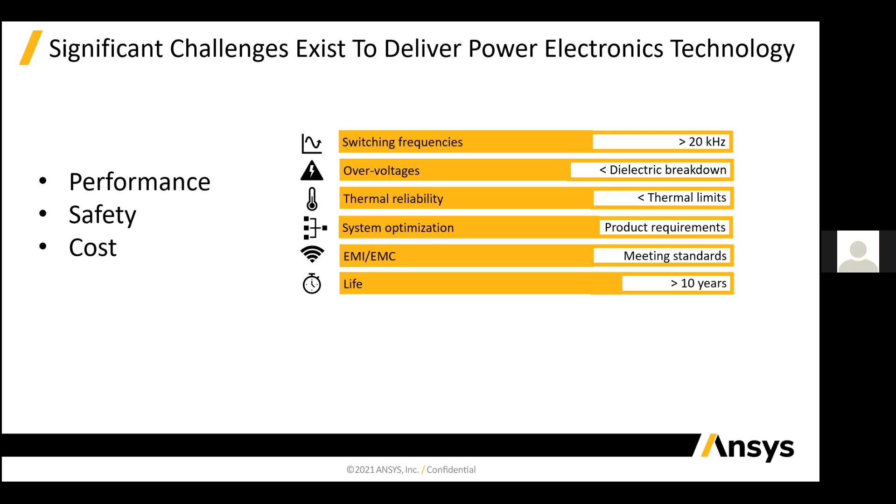Life expectancy also has to be considered, it should be more than 10 years, because people do not want to change all components after 1 year or 2 years, which would trouble their system. So life expectancy should be in the range of more than 10 years - as a standard, we will have to set it.

Next, by using ANSYS, you can increase your performance and speed up your model by up to 200x. We will also achieve design cycle reduction time up to 75%, and the total cost also reduces when we are finalizing and solving the whole model system.

I will also show you today how it looks when you connect the whole EV system in ANSYS. We will discuss this later in this session, and come to know what type of simulation is involved in that. We will also look into how to put the temperature part and how to use the data sheet part - I will show you that.

As we have already discussed, the power electronics requirements from the customer point of view or designer point of view - we basically want power density and increased lifetime, and how we want this increment with reduction of losses, thermal derating, noise, and the over voltage should be within range.

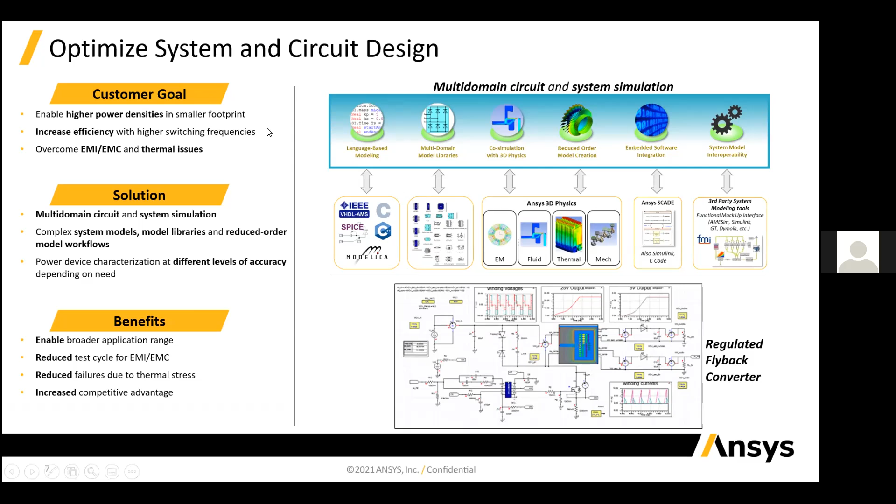Like if you have a small e-rickshaw, and you want to use that e-rickshaw in your designing part, for that you just have to make a range from where to where it will basically work. So that range part has to be considered when we are designing for e-rickshaw.

After that, when the design is over, we just have to look into the materials involved. For that, we will have to check the account for magnetics involved. We have to check what was the cable and what was the effect of that cable, and what electronic transformer is involved, and how we can simulate that transformer part.

And reduced order modeling, and how we can do that fast, so it will work very fast. For that we require temperature limits, and we have to take in or consider the constraints involved in the designing part.

Like you can see here, we have a PMSM machine, and then the load is connected with that, and we are basically having an inverter part. In that, the inverter is controlled by space vector modulation technique, and there are IGBTs, and that IGBT will basically help you control the switching frequency given to the IGBTs, and that IGBT will control the level of voltage and current in the PMSM to run fine.

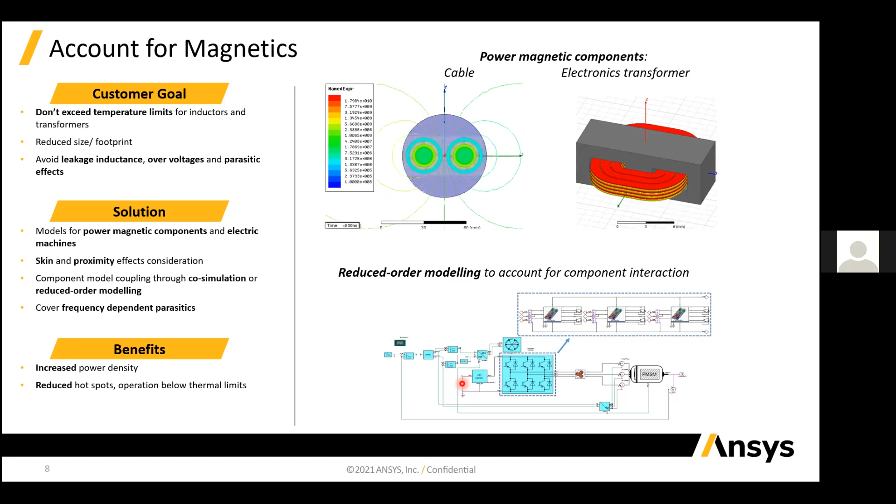And after designing the part, after selecting the component, you just go for thermal prediction. And in thermal prediction, you can see here a red spot is there. So I will also show you how we can mitigate that, how by using ANSYS you can do such type of analysis, and how this will help you remove that. So we will do that also, and we will discuss that later. And that red spot we basically want to remove.

And so for removing the hot spot or limiting the thermal, like if your whole system is there, and in the whole system only one part is getting red hot, so if we do such type of analysis, and if you change that component with any other component, how this will increase the capacity of my whole system. So that also we will easily be able to address.

And the next thing is the embedded control. Like you have to create a model. You have a PMSM model. You just have to create it, and after creating, you just provide a control system. And by providing the control system, you are basically setting how this will behave. So that behavior will be used, and that will basically give you the whole information in the form of code.

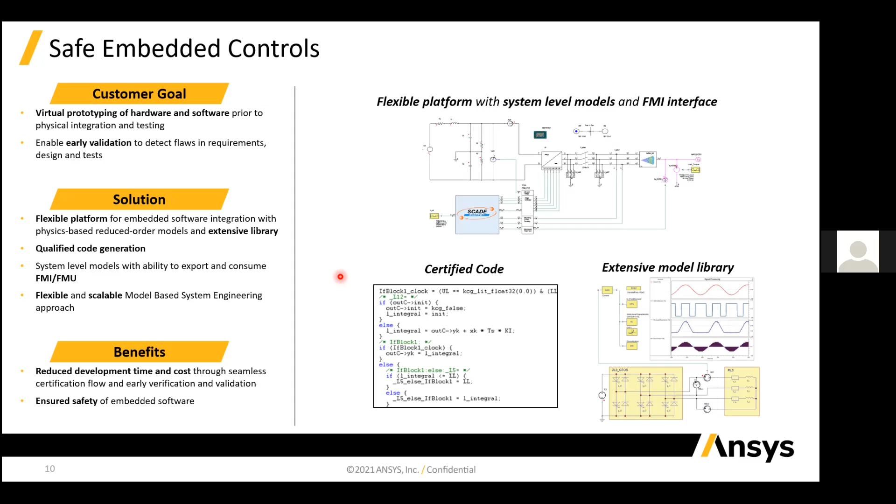And the next part is the EMC certification part. In that certification, we have a system like this, and in that system we have two things. We are comparing how to conduct the noise prediction part. So for that we just have to go for designing, and this will basically give you information about early detection, and if you detect it early, you can mitigate that, and this will also reduce your time and cost by 20 to 40%.

And then you have a PCB reliability system. Like you have a PCB, you can also do the life prediction analysis. You can also do the multiphysics coupling simulation in a single platform, and many other options like materials and component library options are already inbuilt and available there.

So that ready-to-use model will help you in designing your PCB level, and this will also give you the time at which it will fail, and the time of failure will be also there. So you can easily predict the lifetime of your whole PCB design.

So these are some things about ANSYS. ANSYS is basically the number one simulation software for designing and for doing simulation, and this will basically give you an early edge beyond other software, and this will give you information on how we can proceed. So I will re-share my screen.

Okay, IGBT. Okay, Twin Builder. Okay.

Now we will basically look into how we are going for the controlling part. So in the controlling part, a BLDC motor control system is there. Like I have already showed you, we have a BLDC motor, and how we can easily create a motor by using RMxprt and Motor-CAD. So we can easily do the analysis for that.

And after doing that analysis, the next step is we just have to connect it with the inverter part. And after connecting this motor with the inverter, we require a closed loop or the controller. So for that controller we are using the SCADE suite option. So in that SCADE suite we just have to feed the information, and then we have to analyze that.

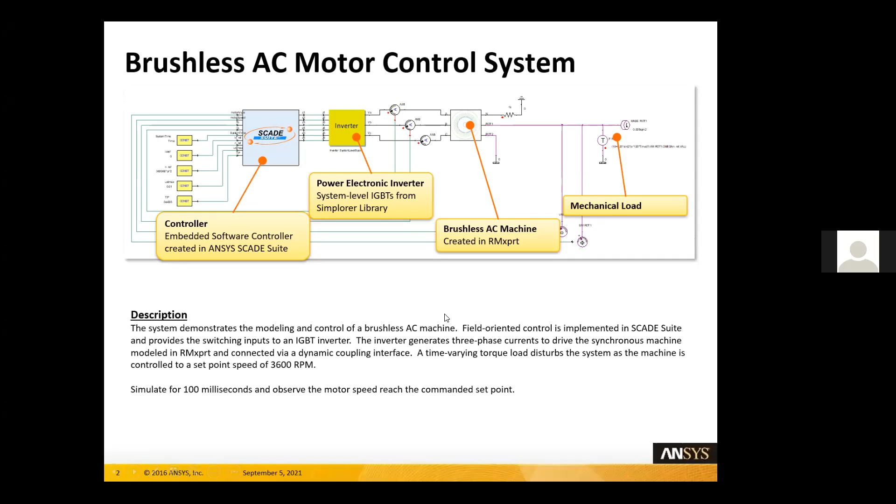And after doing that, a description is there that an IGBT inverter is involved. So I will show you how it looks when we are going for the simulation part. So you can see there the mechanical load is also connected, and that mechanical information will be given to the BLDC motor. And in that we will do the BLDC drive SCADE control options, and these are the SCADE control and the RMxprt flux weakening techniques available.

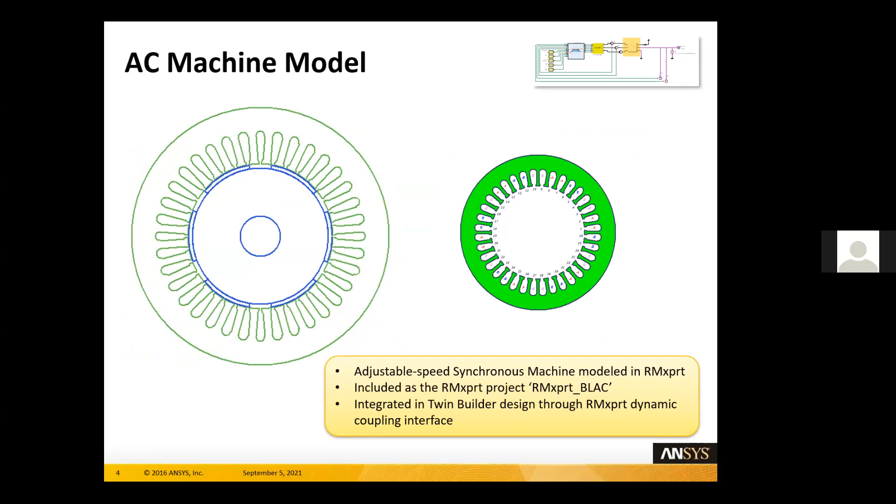And how the AC motor will look, that AC motor will basically look like this. That was created in RMxprt. And that part is the stator. And now next we are basically focused on the inverter part. So the inverter part is basically how we are connecting the IGBTs, and there are 6 IGBTs we are basically using for the 3-phase supply.

And then we are giving a DC supply to this, and from DC to AC supply, and that will basically help you provide a perfect supply to the BLAC motor.

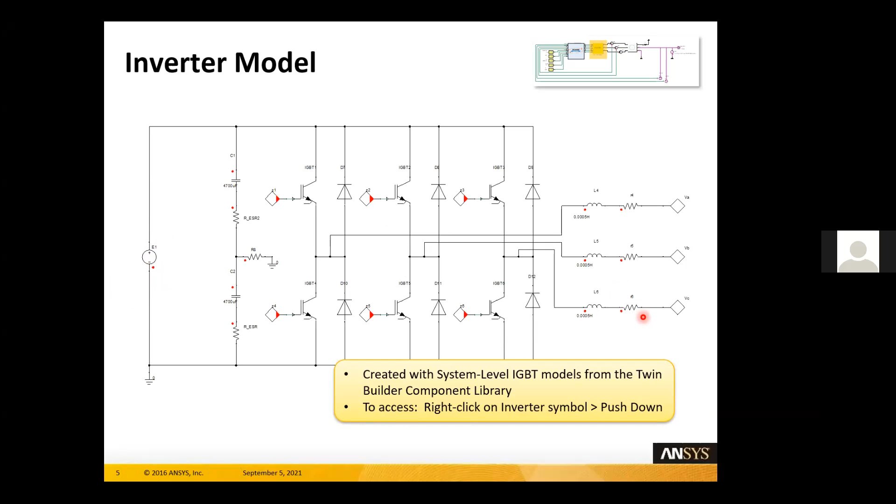Okay, and then for that we will design the controller, and how we will design that controller is by using the ANSYS SCADE Suite option. So that will basically help us in the designing part.

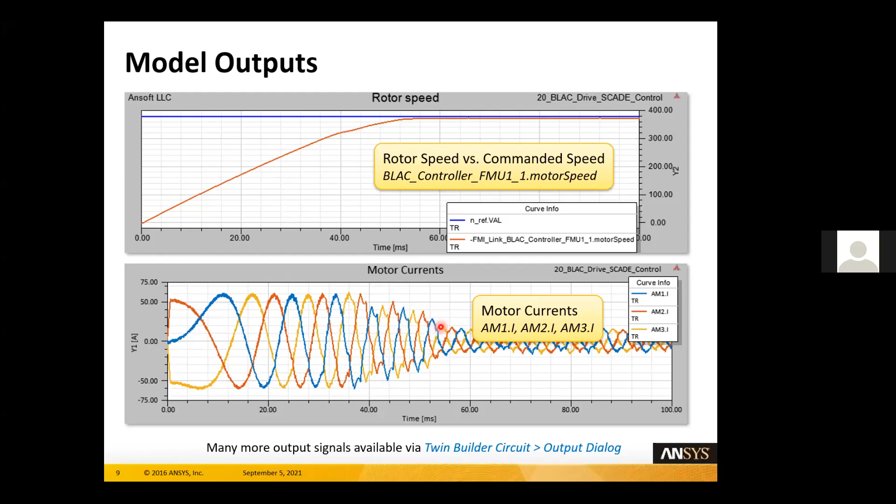Okay, so then I will reshare my screen. Okay, I will share it. Okay.

So how will we design the IGBT and the half bridge inverter? For that designing part, we basically have to open the ANSYS Electronics Desktop, and from there you will get a look at the power module, which will look like this. We are basically analyzing the whole system. In it you can see a small wire. So that wire, its capacity and what power it carries, we have to take care of when we are designing our whole system, like whether that wire will be able to sustain the whole system.

And the plates we are connecting, one plate here and one plate there, whether they will be able to sustain the temperature, will also be checked when we do the whole simulation. Here you can see the collector, emitter and load connection, and the circuit. We are designing that circuit in structural form, using the DC plus and DC minus options. Red is for plus and blue is for minus, and we are connecting them, which will help when we go for the final design.

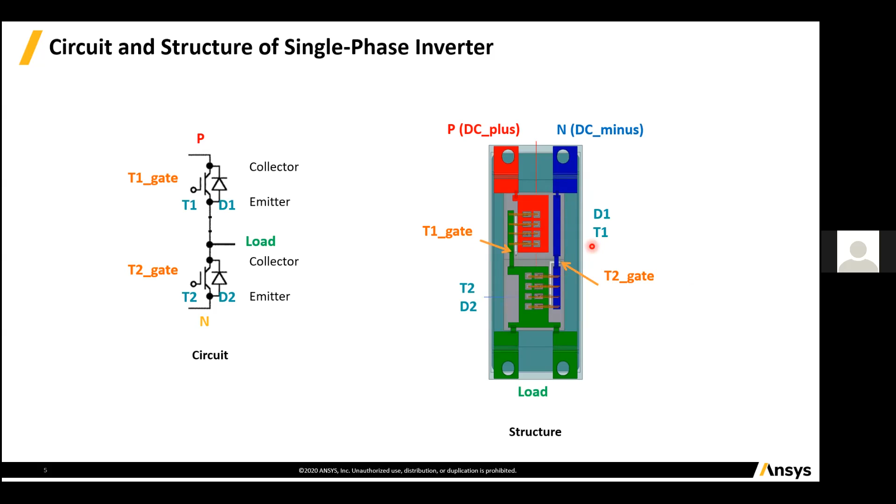This is one leg, and for another leg we just have to create the same leg, and use it for designing our inverter. When we design the single phase inverter, it will look like this, with the positive and negative parts. And we have to check the thermal analysis part. We'll first draw one by one, and after drawing the whole system, if we have selected aluminum and copper, we have to take care how we select the materials for the connecting wire and what type of heat sink is required. We have to take care of all these things when designing power electronics devices.

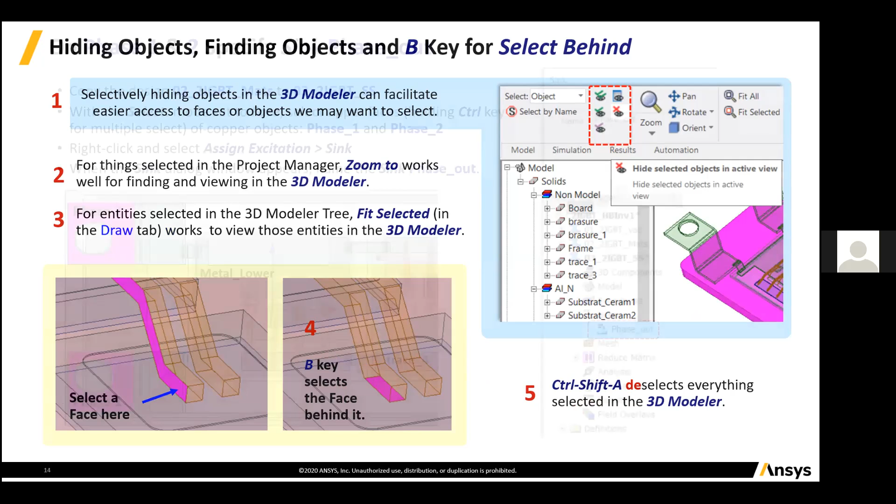The 3D modeler option is there in ANSYS. The 3D modeler or the zoom option will help you decide how to select the face and the model, which part you are focusing on, so that you can easily do it. If we are interested in selecting this, we select only that. And if we are interested in selecting the B face, we select only that B face. After selecting that and designing the whole system, we just have to analyze it.

Before going to that analysis, as we have already discussed and I have already shown you, the blue metal is for DC minus, the green plate is the phase out, and the red is for DC positive. After selecting the whole, next we have to analyze the pins, and after analyzing the pins, we have to make the connection.

Aluminium bond wire is there, so we just have to connect it, and after connecting, we are interested only in that connected phase with the aluminium part. There is a connection, so we have selected only that phase. Here also we have selected, and in the whole model we have selected only the IGBT down and the IGBT up, so upside and downside.

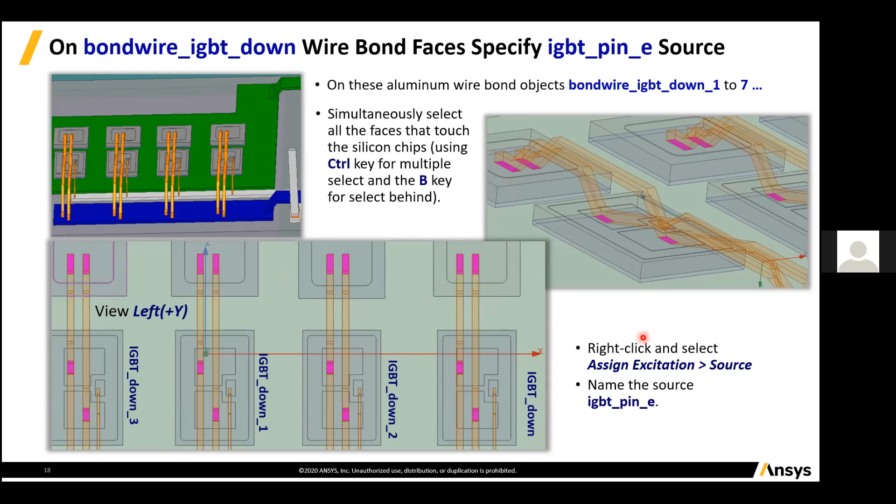So after selecting the whole faces, next we just have to model it, and after modeling we have connected it to the heat sink. Okay, so after selecting we just have to proceed like this, and after selecting, gate, down, sink is there, and the sink and source is basically input and output.

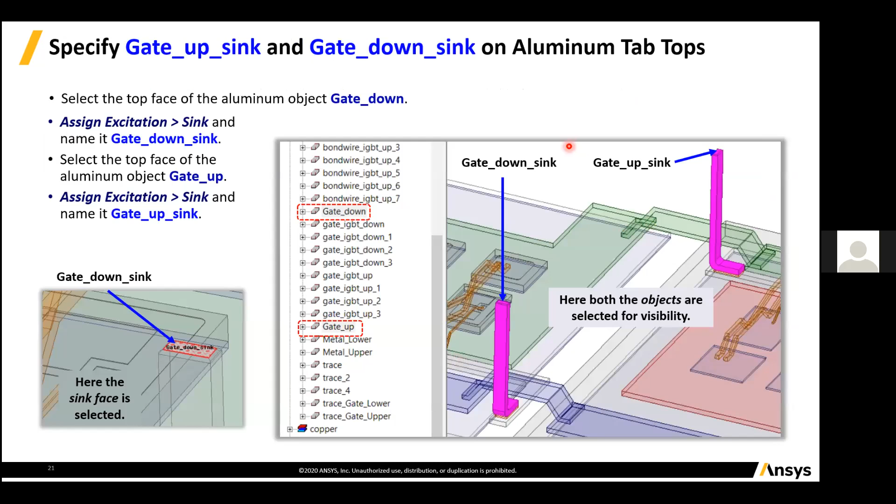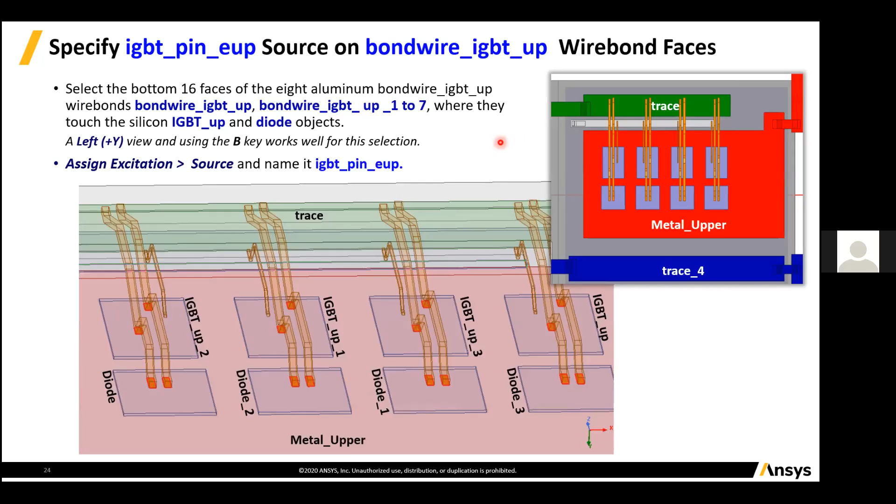So we are connecting it and selecting it, and next, after doing that whole analysis one by one, we have upper metal, and we have traces; the blue color and the green color specify the different things. And the next step, the metal lower part is there, and the trace part is there.

So after doing that we just have to supply the DC minus name for the sink, and after sink the DC plus option is there, and for the next steps I am just fast forwarding. So when we design, it will take time, and after designing we just have to go for the simulation part.

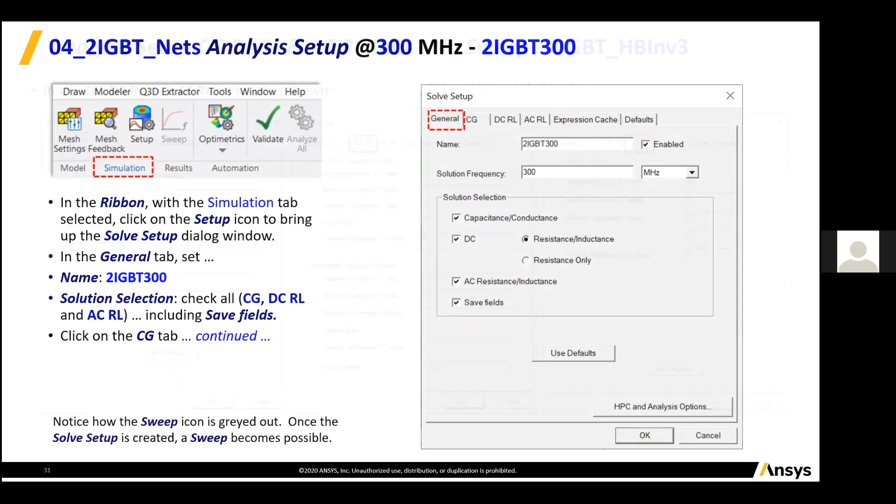And so we have to set the name, we have to set the frequency, like here it is set as 300 megahertz. So we can also set it, and we just have to set the solution setup, and after selecting we will be able to calculate the DCRL resistance value, and then we have to press OK, and then we have to validate our whole model.

And after validating our whole model, we have to just go for checking how and what we have designed. So you can see here the colors; those colors basically provide you information as J AC, which is ampere per meter. You can also select linear values there and log values there. Log value will basically give you detailed information.

And next you can check the colors, and by using the colors, if you find any problem in that design, you can also change it. I will also discuss one Ansys customer. So you can see here that strip part, and you can see the width of the strip here and here. That will be thicker than this. This is a thick part. So they are getting more temperature here.

So what they have done, they only changed this much, and that basically increases the capacity of the whole IGBT system. And that increased system helps them use the same IGBT, same model, for the higher rating, so they can use the same material they have. They will also use it for the BLDC or PMSM motor. So they don't have to go for a higher rating of the whole system, only by changing the width of this, because for the transient period of time they are going beyond certain limits or ranges. So that's why you can easily design it in Ansys, and you can easily decide how and where to make the changes.

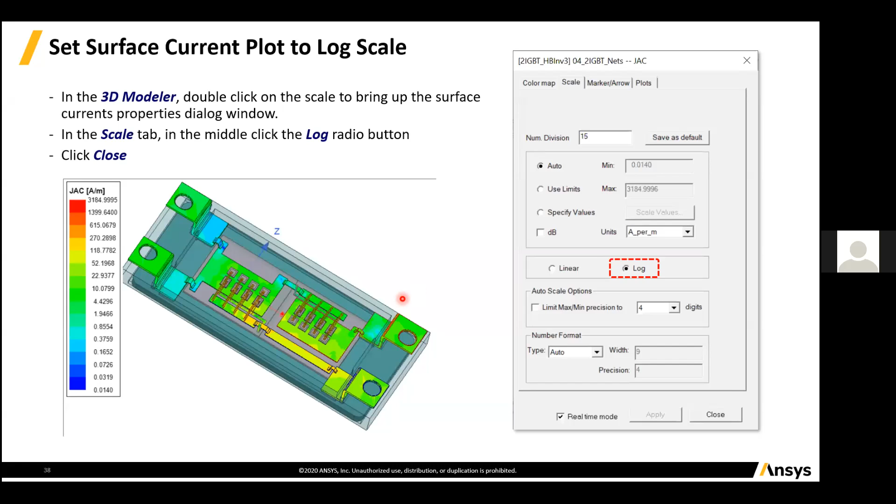And after doing the whole analysis, here it is the resistance at 1 hertz, and we are setting all the information. Then the next step is to get the results like this, like DC plus, DC sources, and ADC. This will give you the frequencies, and there is an ACR option for the frequency.

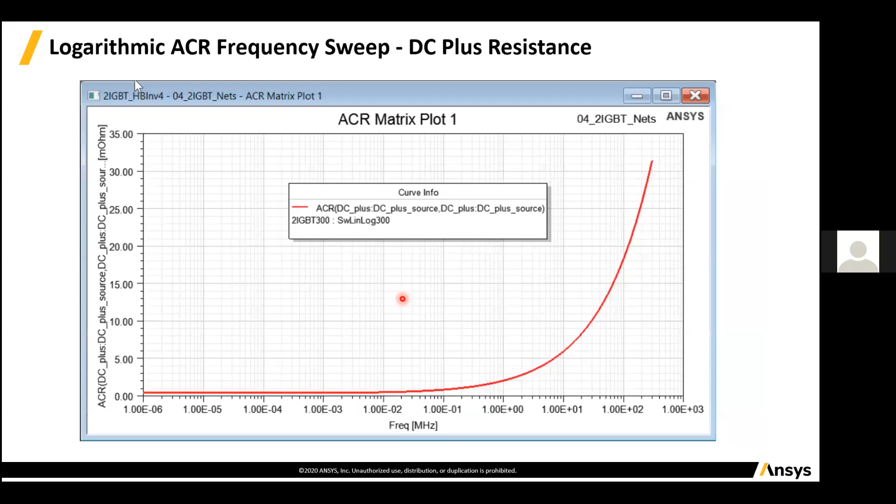So I will reshare my screen to go to the main design part in Twin Builder. Okay, so I will show you how it really looks in Twin Builder. Okay, so first, we have created only one single IGBT, and we are feeding it with the data sheet we have. So let me show you the data sheet which I am referring to.

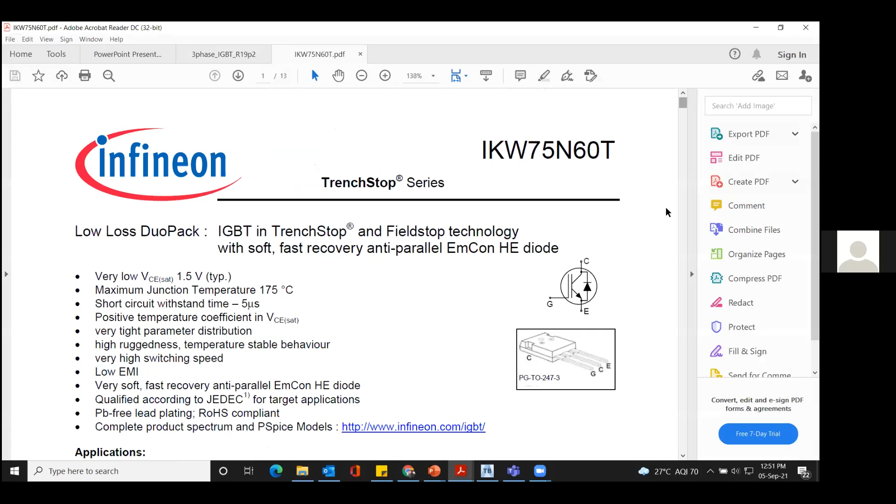So which IGBT we are basically preparing is this. Okay, so we are using this IGBT, IKW75N60T. So that you can also do for your example. What you have to do, you just have to go to that data sheet, and from that data sheet you will get information, and you just have to put that information into the system or the simulation. So that will basically give you a perfect result for your designing part.

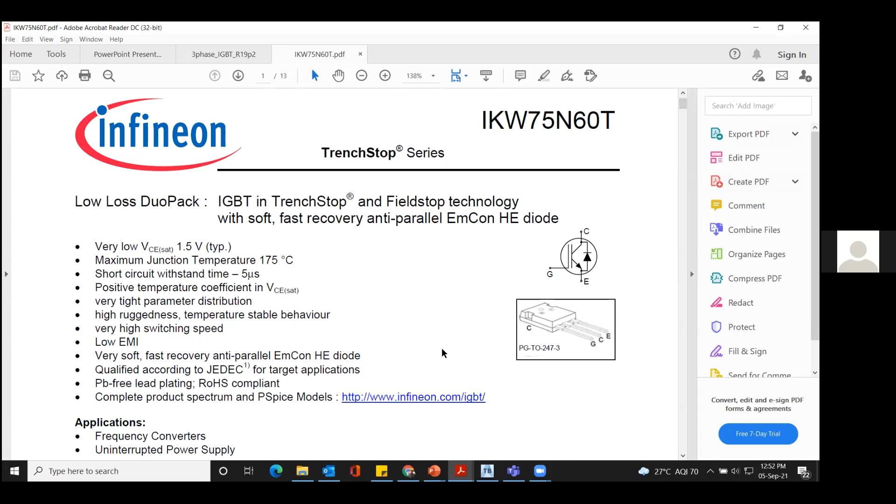And if you don't proceed like this, this will create a problem; you will be haphazard, and you will not be able to decide whether you are doing correct research or going in the correct direction or not. So that we will have to take care of when we are going for the final designing part. Like you can see here, the maximum junction temperature is 175 degrees Celsius. So that we have to take care of. That was the range of the temperature. We cannot go beyond that. So we have to set that part.

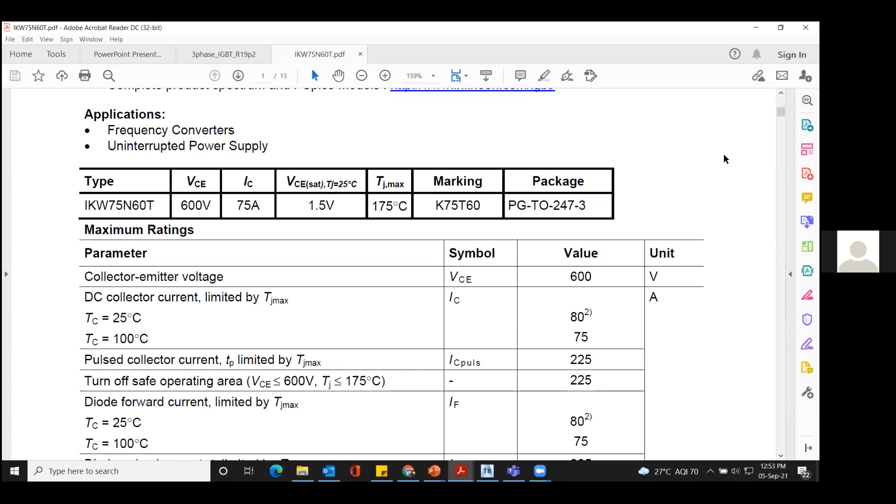So like that, you can see here short circuit withstand time is also there. So we just have to look into that. And next we have to check what the rating was. So you can see here, we have selected it for 600 volt and 75 ampere, and that packaging. So that we have to consider when we are going for the final designing part, because you are using that component only, so you can also use it. Okay, so that model I am using, that material I am using.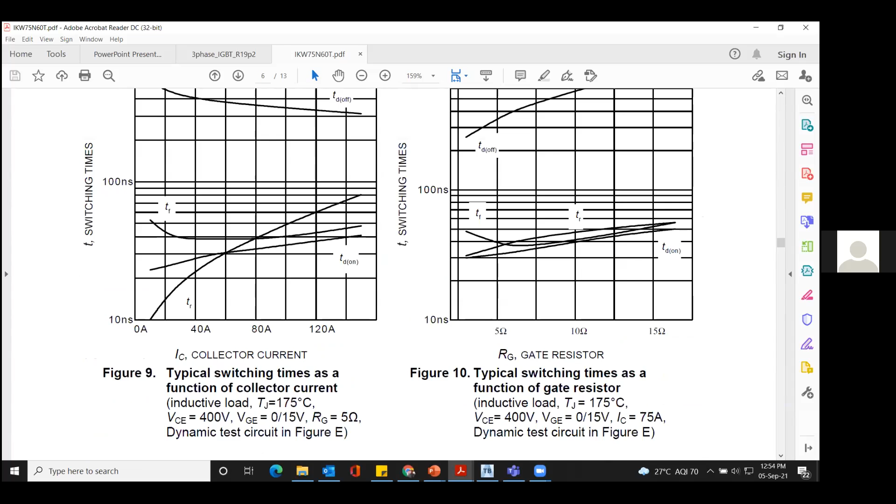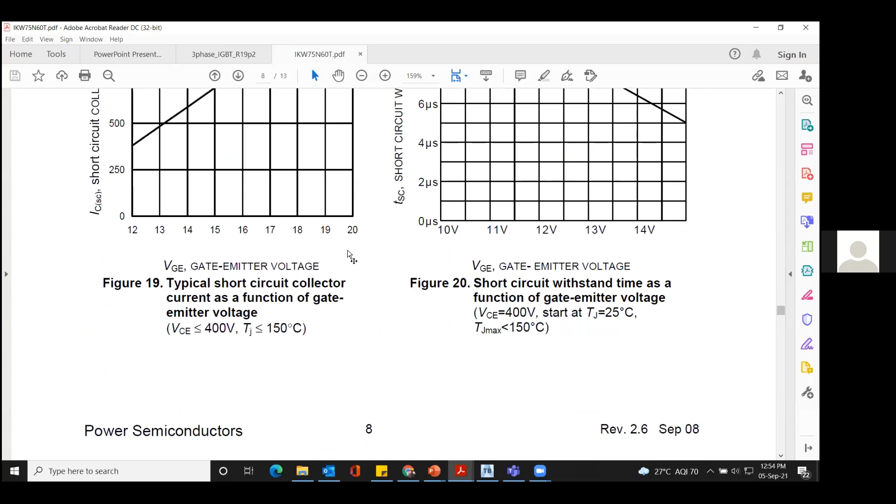So like you can see here, the data sheet, and in that data sheet you will get the resistor and the collector current, and you also check the junction temperature and the other things. So you just have to look into that and cover the whole thing. And after selecting all the ranges, go for designing it. So when you go for the designing part, you can see here we have set the temperature for this ampere range, and the frequency 1000 for the gate pulse. And then I am checking it.

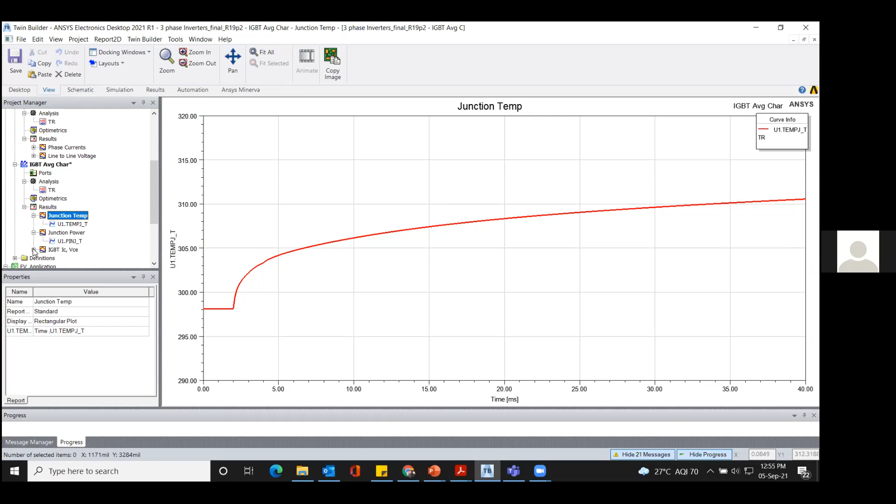Okay, so what was the average? I will show you the result, so that will give you a clear idea, and what junction temperature it will reach when I run it. So I will run it for 40 milliseconds. So we are getting a junction temperature of 310. And if you go for the junction power, what the losses are and what power it will generate, if you click on that you will get the junction power for that particular time, 40 milliseconds, when the switch is on. And the IGBT IC and VCE characteristics.

And you can see one more thing here, let me zoom it. So you can see this part, the switch is on, and when the switch is on, the voltage across it is zero, going to zero. So that part will create a problem when we are designing, because of switching loss: you are getting a current and also some voltage here. So that voltage into current will produce some losses, which we have to consider as switching losses, also when deciding the component and the short circuit withstand capacity.

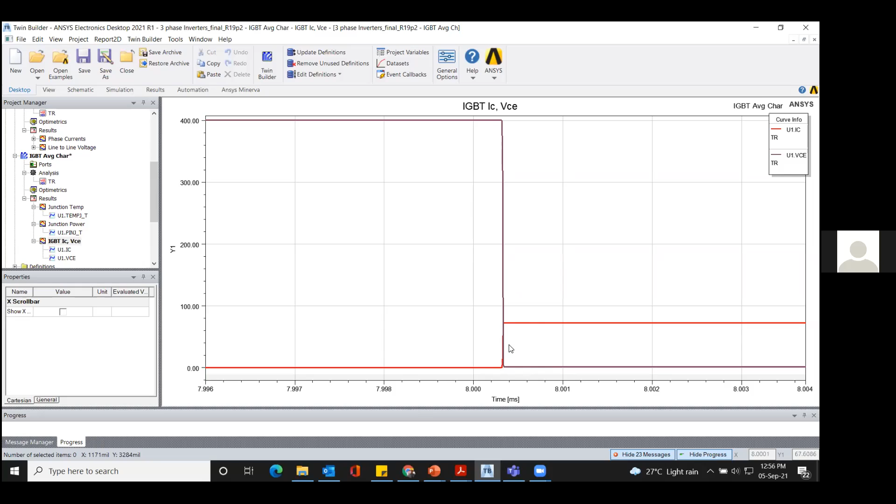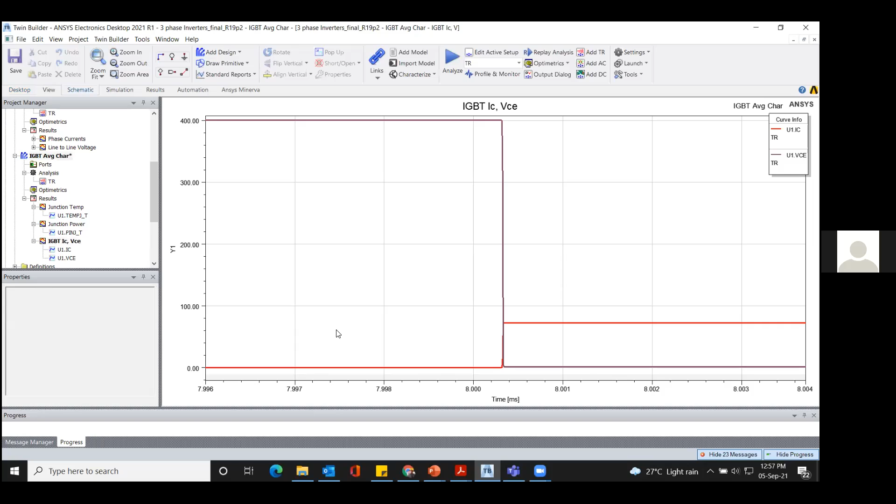And like you can see here, the junction power, junction temperature, so for the one we have decided. And the next step is to connect it as a three phase inverter. So what we have to do, we have to use the same IC and connect it in that form, like I will show you.

Okay, first we will go for this simple system. In that simple system, we have an AC supply. Like, if you are interested in creating a charger for the electric vehicle, you have an AC supply, and from AC we want DC supply.

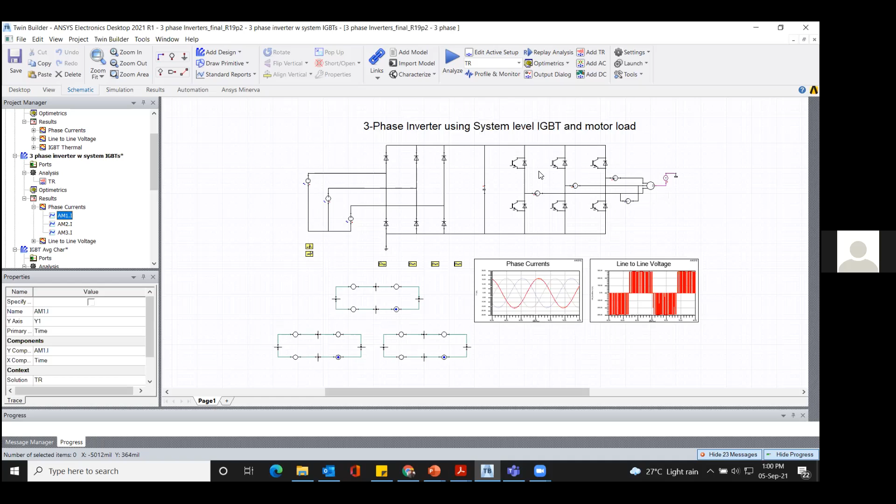And after doing that, if you run that model, you will get a phase current for the single phase. I will zoom it a little bit. Okay, so you will get a result like this. Right now I am not using the thermal constraint. I'm just connecting this simple way, using a simple three-phase inverter. So what result will I get? That you can see here.

We are using an AC supply, connecting it to the rectifier, from rectifier to DC supply, from DC supply to the inverter, and then inverter to the motor. We have simply used a motor, but by using RMxprt we can design our motor, and that designed motor will be imported into Twin Builder. I am using the IGBT, and we are exporting all the information of the IGBT from the datasheet, so that will give you a correct result. And if you also import the motor from the design information, you will get a correct result like hardware.

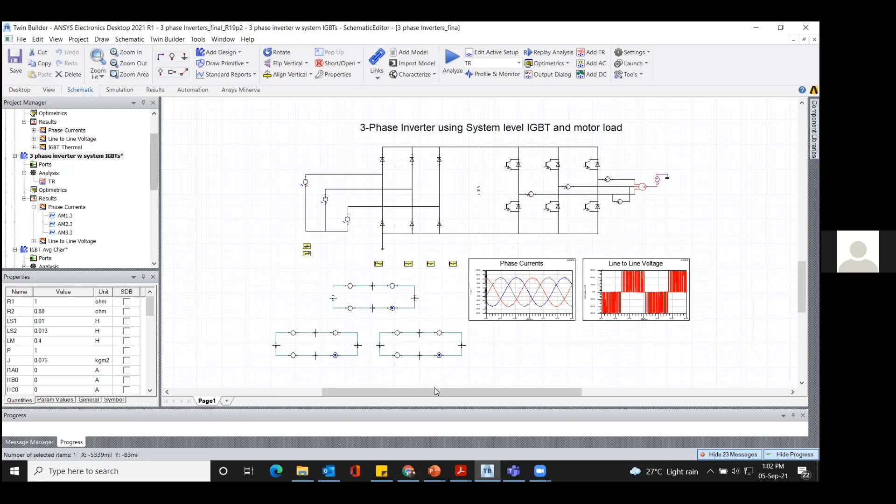Now we will add the thermal information to our IGBT also, and then we will check. Okay, now we have an inverter with IGBT and the motor load, and I have given the thermal information. A thermal package is there, and from that thermal package I am giving the information. Okay, thermal information is also in, and if you run that simulation, it will hardly take 1 minute.

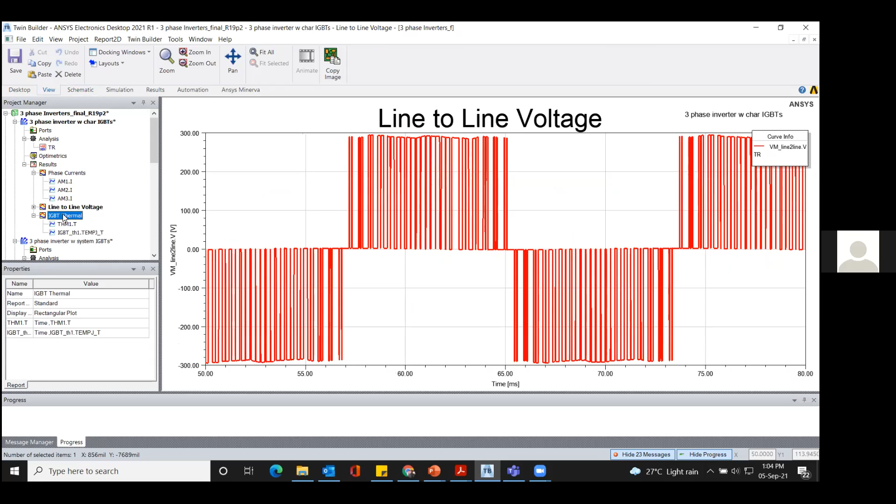So then I will show you how we can design it in a step-by-step process. I will reshare my screen because I have recorded that part.

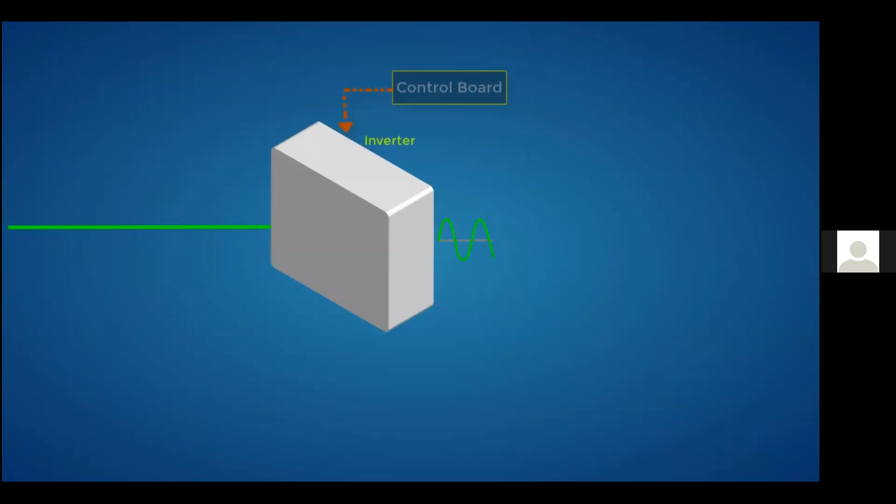So you can use it. The inverter is there, and you are getting a three phase DC-AC supply, and we are using IGBTs. Then that is the AC motor, and from transformer to rectifier, rectifier to inverter.

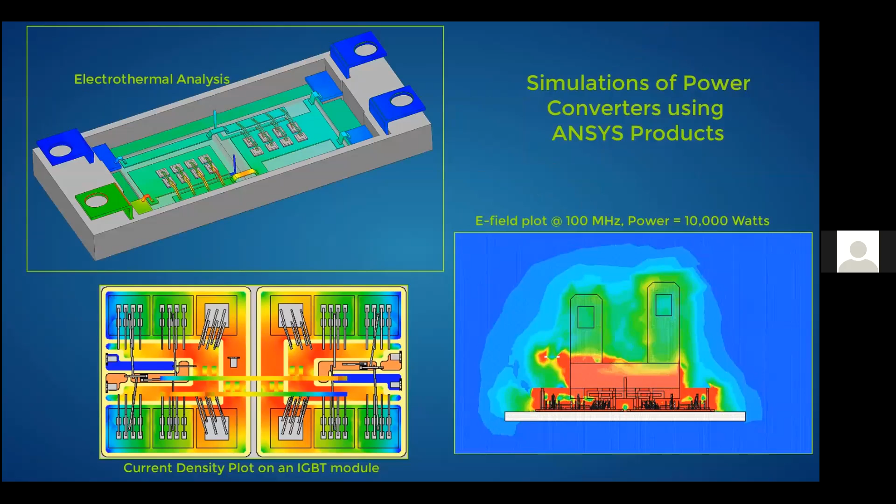So we are interested in simulation of the power converter, and with that power converter you will get a current density plot on the IGBT like this. Now, as I already showed you, this is how it looks when you open it in ANSYS Electronics Desktop - the half bridge inverter will look like this only.

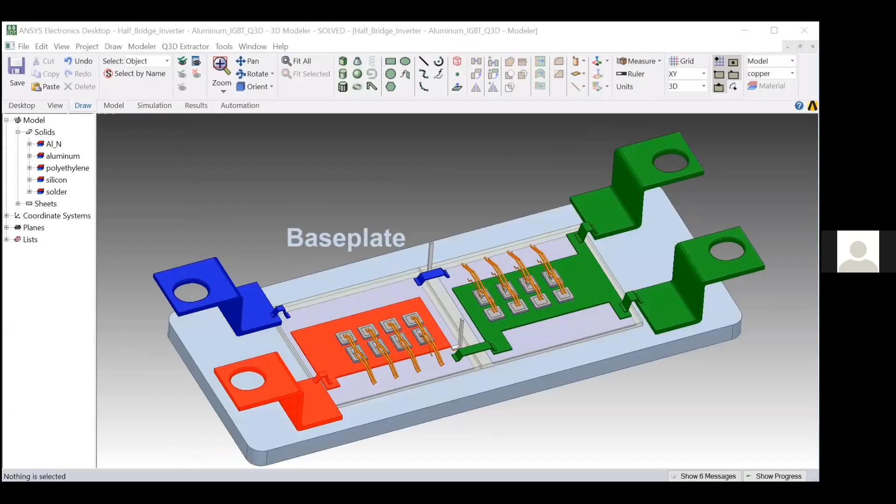So we just have to solder it, and the substrate is there, and the base plate for the heat sink. Then we have to put the whole system in a frame, and then we have to check DC minus, DC plus for the DC supply, and for the phase. Then for the gate down, gate up.

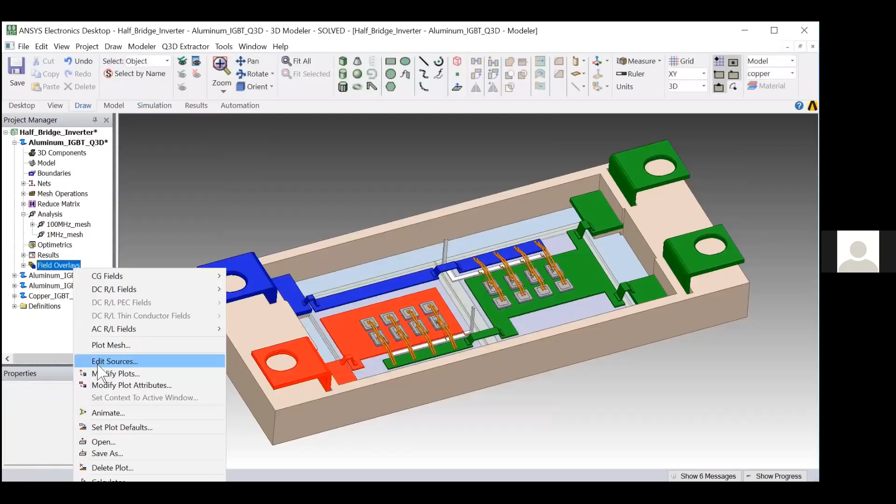And we can easily edit the source, like DC positive and DC negative, to the phase.

And in the history tree, you will get information like selection of the material, aluminum, polyethylene, and then by using Icepak, we will be able to predict the temperature.

We just copied that model which we designed to Icepak. Aluminum, and these are the components - diode and the IGBT.

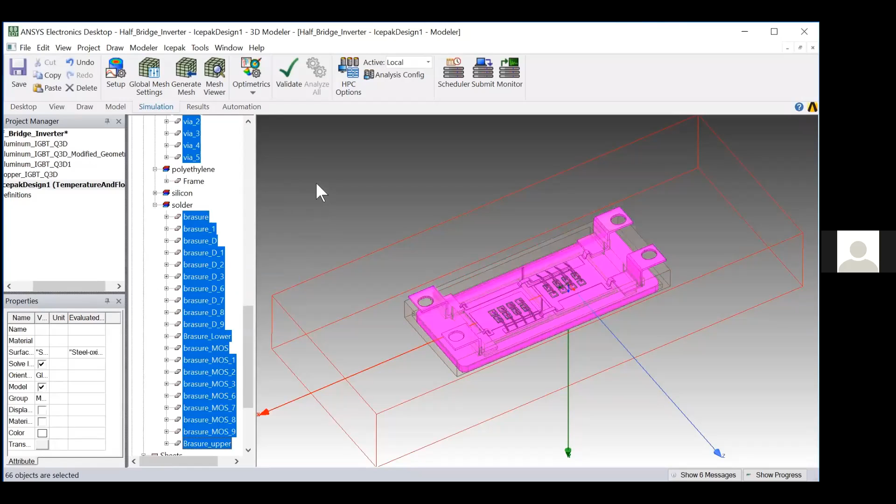After selecting, we have to assign the thermal. First, we will go to EM losses, electromagnetic losses. Then we have to simulate the design, and for the simulation we have to press OK. Then your model is created in Icepak.

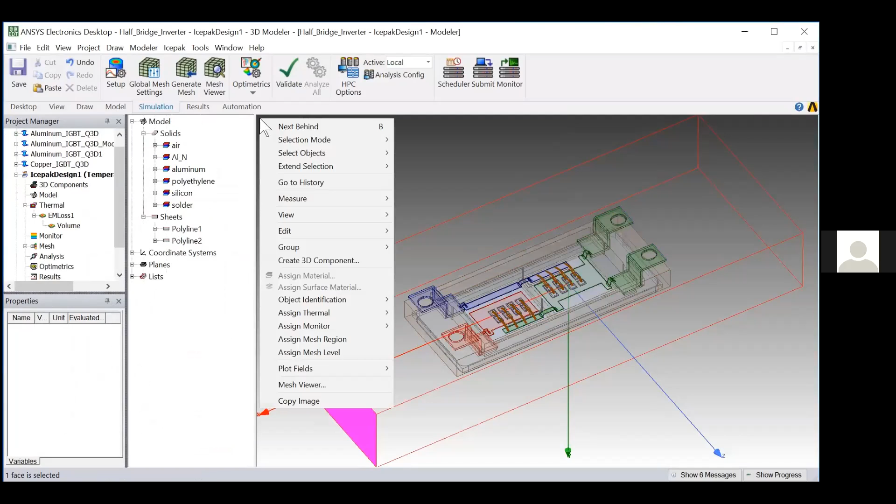Select the face. I will fast forward this whole step, showing how to do this analysis, and then we will go for the analysis part only - we have to press analyze. Okay, and then I will show you the next step.

After designing and selecting, we have to plot the temperature. From the temperature, you will come to know what the range of temperature was that we are getting. You can see here the temperature ranges from 30 to 114.51 degrees Celsius. That is the maximum temperature we are getting here.

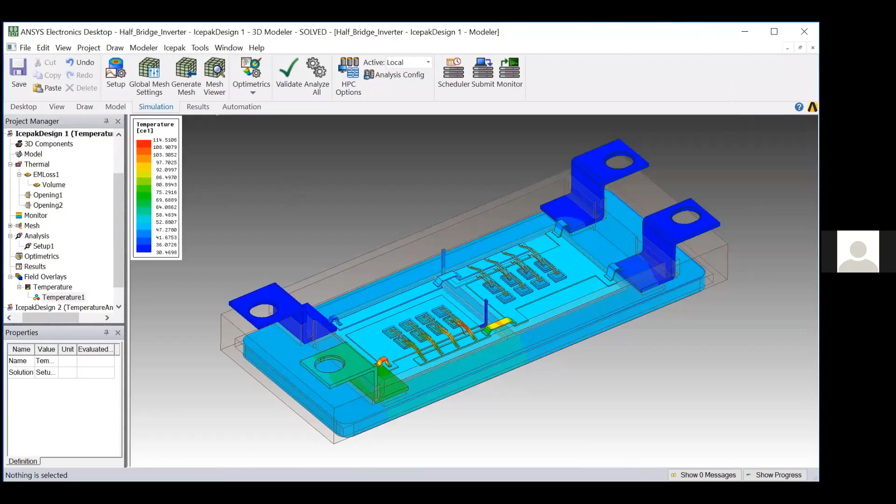We just want to reduce the range of this temperature. Our main focus is on temperature optimization, so we will optimize our temperature and reduce it. For reducing, we have many options available - we can change the material, or we can also change the width.

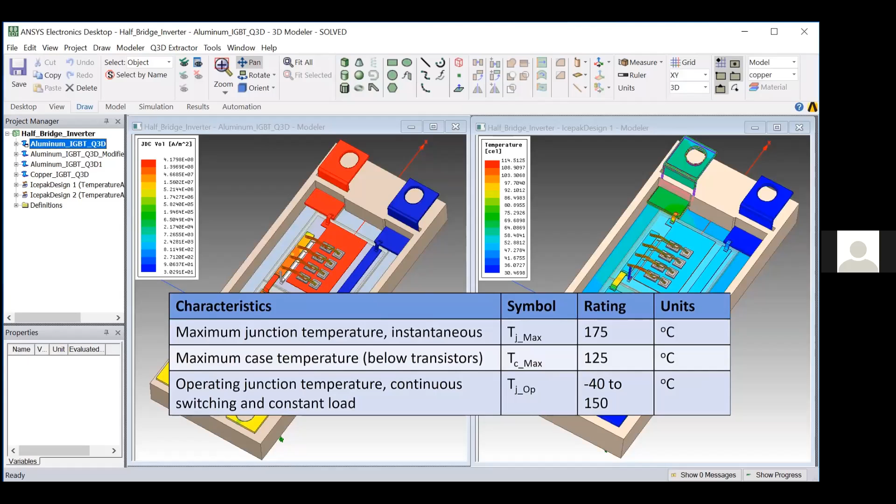For that, we just have to select that part, and then we can compare it - first one is the Q3D EM model, and second one is the temperature model. These are the parts of the connection, and these are the wires. That is the point of main concern where we are getting maximum temperature, because we are using that particular IGBT which I showed you the data sheet for. So for that only we are designing this.

So select that object, and then you can see the area.

And then we have to select that size of the area, and from there we will change that, and then we will recalculate and reanalyze our whole model. So first we just have to save, and then we have to reanalyze it.

Now we can see the temperature will basically be reduced, and how much it is reduced, like earlier it was 114, and now the maximum temperature is 93.54.

So similar analysis you can also do for the other components and other things like reduction of temperature, reduction of the size, and this reduced temperature will basically help you to select a heat sink size. So that heat sink size also you have to consider, and take care when you are designing.

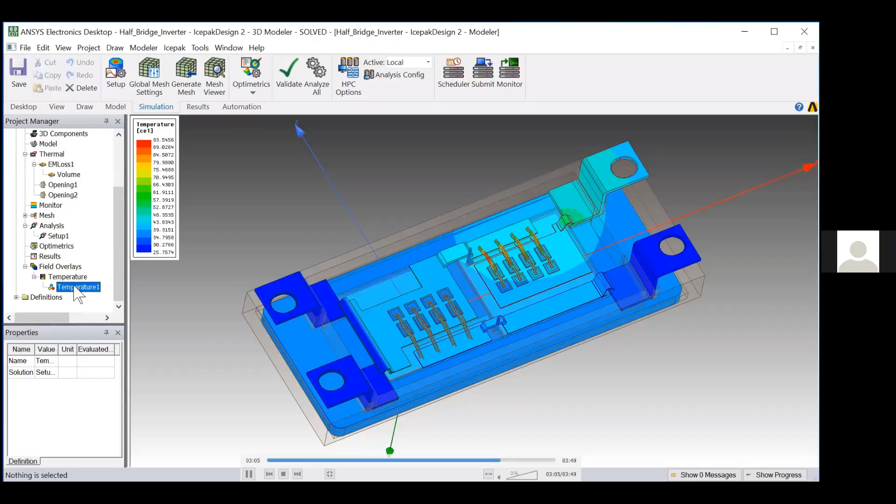And in that you can see the temperature is set to 93. So this way you can also design your IGBT, MOSFET, or any other device, and do the analysis like temperature analysis or any other thing. So you are getting the maximum temperature here as 93.54, and we can also check thermal specifications.

And this is the modified, and this is the original. In the modified you will see the original was 114, and in that we are getting 93. And for the next...

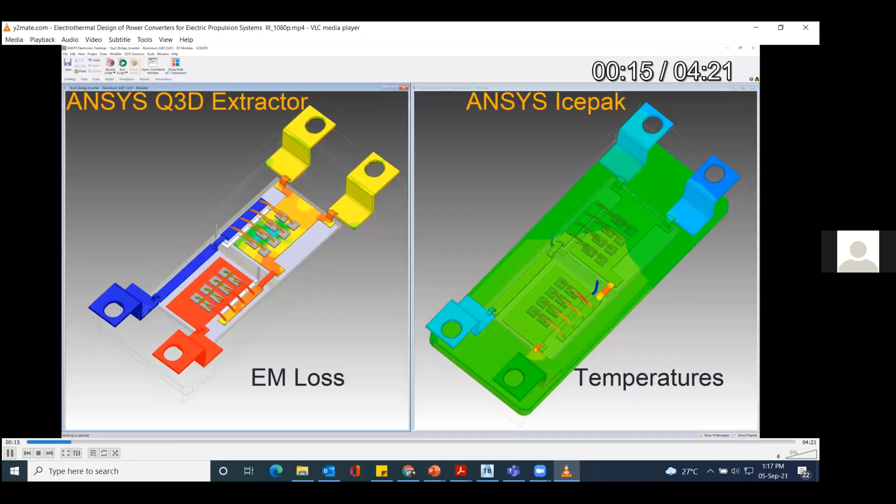Like we are interested now in changing the temperature range. Now we are getting 93 for the wire part, and we have to connect it as a three phase, so we have to select and provide the cooling system also. So for that we have to assign boundary, and then we have to press OK.

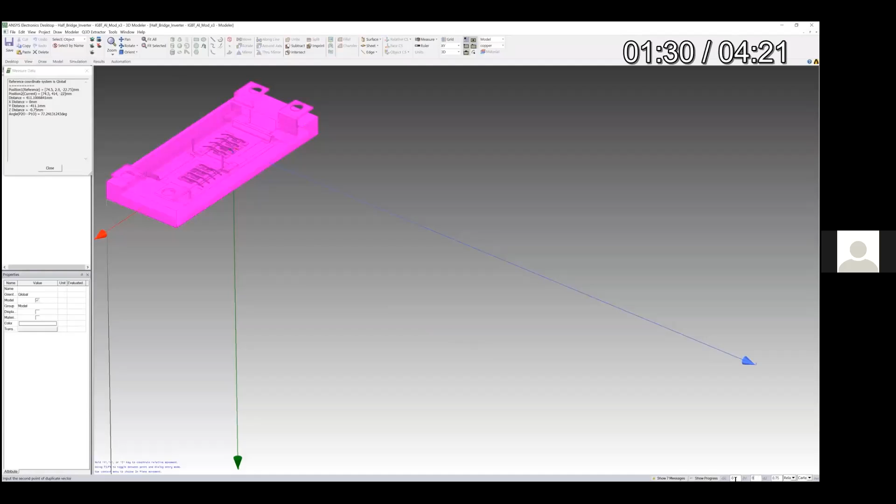Then we have to select the base, and we just have to copy and paste it, creating a duplicate of the same design we already made. After duplicating, we just have to place that, and then we have to make the connection.

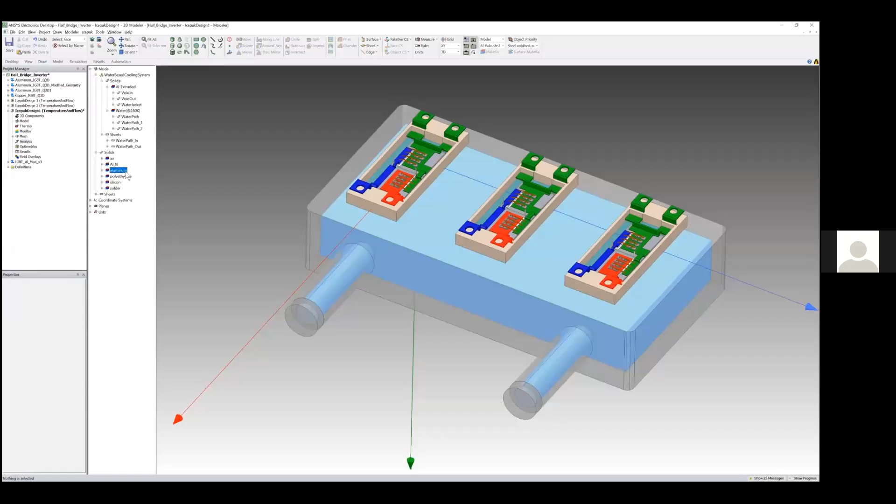And this is the water-based cooling system which we are using here. So we just have to assign thermal, press use this project, and then select the source design, which we have already selected earlier, so we don't have to change that. And now the water is also selected, a water cooling system is also selected.

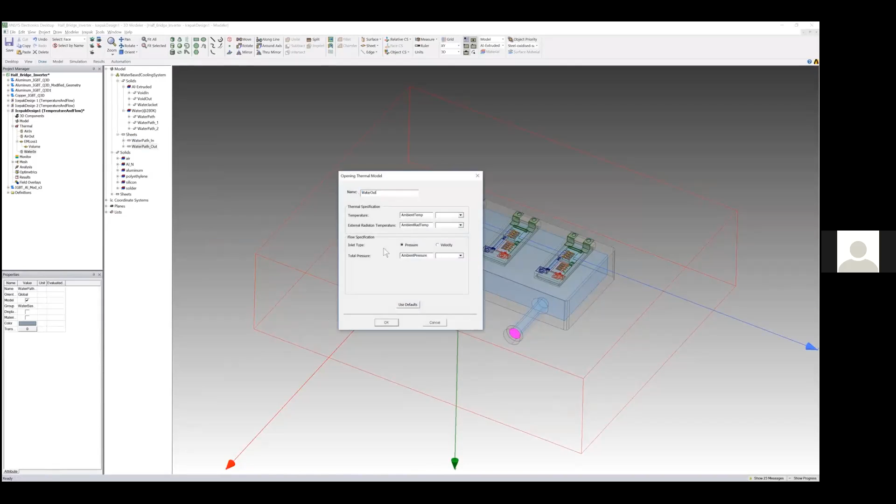Water in, and we have to set the velocity in meters per second for the water, and we have to set the water out. Then we have to analyze it, and then you can see here what the temperature was by using this water jacket, water in and out.

We are setting it, so you can also analyze it and change the material of the water, like from water to oil or any other, as we have already discussed at the start of the EV sessions. We can use the cooling system according to our need, so we just have to set it.

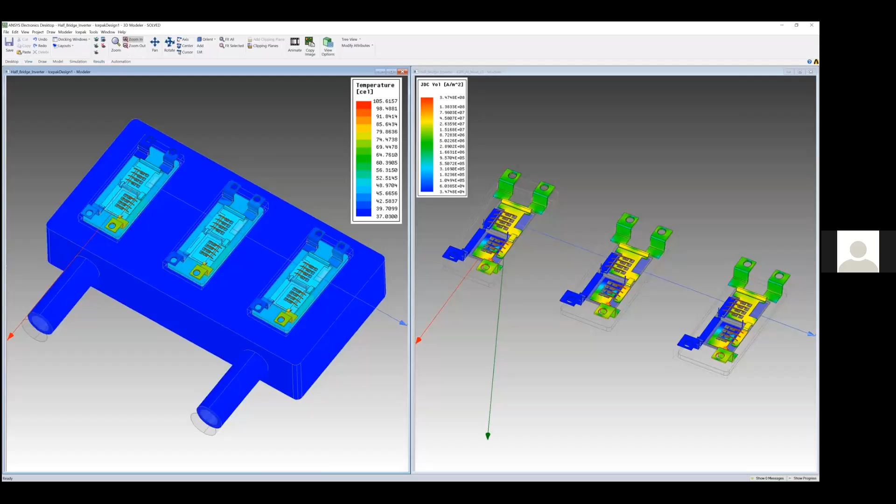Then we zoom in and you can see here. So that is the main area of concern. That red is hotspot.

So if you want to change or reanalyze it, you can reanalyze your whole system and check if your system is working perfectly or not. This will basically be an animated part, showing the particular range, so from that you can easily check your model.

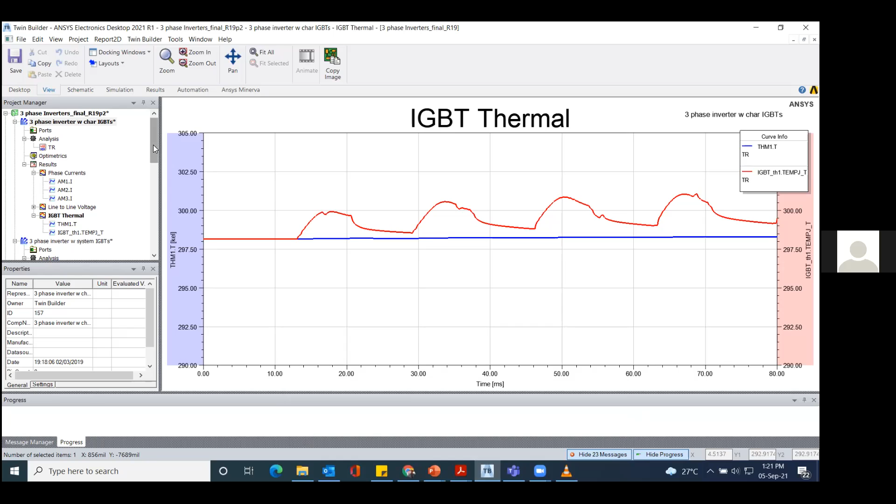And after completing this system and the whole analysis of your IGBT part, we already connected it in the thermal form. And now the next step is to go for full EV model design.

Like what we did from the start, we just selected IGBT. From the data sheet we created an IGBT and fed the information into the IGBT. Next we created a 3-phase supply, from that 3-phase supply to DC using a rectifier, and from DC to the inverter. And what we are doing next, the inverter to the motor, and now we complete modeling with the inverter, and that will be fed with the thermal part.

And then we will go for analyzing the whole temperature part also by using ANSYS Icepak and the Q3D extraction. And from that Q3D you will get the value of resistance of the wire, inductance, and the capacitance part. And after completing all the things and deciding what type of inverter we are going to design for our electric vehicle...

So the next step is to connect that inverter with the EV part, the electric vehicle part. So for that, we will go for complete simulation of the EV model. So first, I will show you the example which I have already shown you.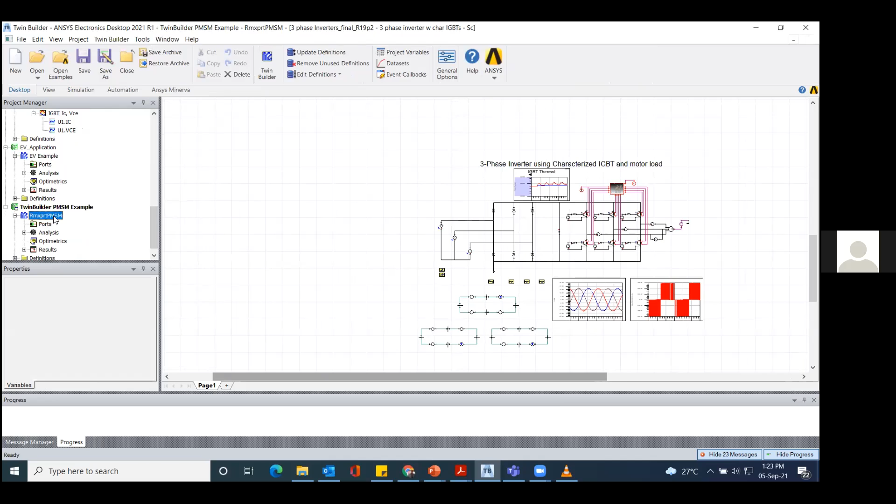Like first, we will go for the PMSM part. Now the inverter is created, DC supply is there, and we are controlling our inverter. By using that inverter part, we are controlling the speed of our motor.

Okay, let's zoom in a little bit on the motor part. First, we will check it.

So the inverter, the motor, is created using ANSYS RMxprt. You have kept all the information, like the size of the motor, and other information about the motor, what was the rotor, whether it is an SRM switched reluctance motor or a PMSM motor, and the size of the permanent magnet. So you have fed all the information and analyzed your motor part. So the motor part is over, and after that you analyzed it.

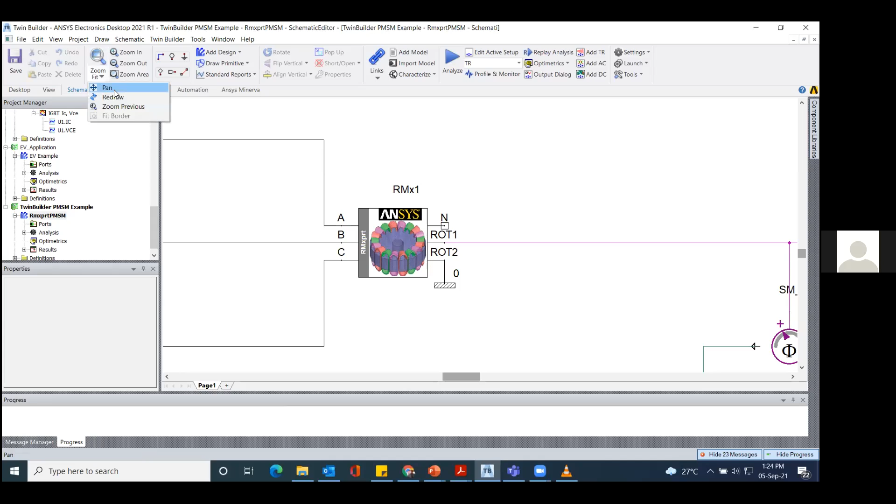And after doing this part, you analyzed your inverter part. After analyzing the inverter, the next step is controlling the speed of the motor. So now the correct motor is designed, and you have also checked it using Motor-CAD, confirming your motor.

Now you are connecting it with the inverter, because we have done so much analysis on the IGBT part. So we will come to know what temperature range it will achieve. After doing rigorous analysis, we used that IGBT here, and after that we are simulating it and getting a result like this.

So I will show you the results, and then we will go for the complete EV modeling. Let me first show you the control signal which we are providing.

What we are doing is basically providing a control signal like this. We are using a carrier signal of a triangular wave, and we are cutting it according to our use, and this will give you a result like this.

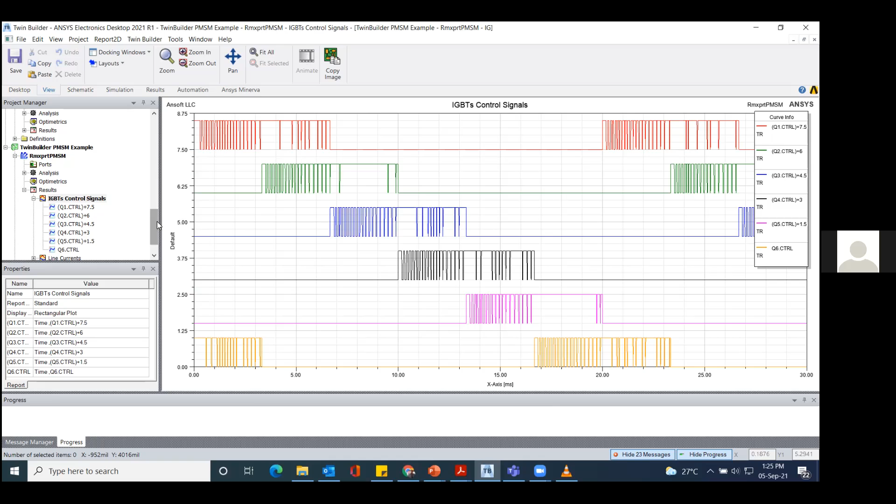So you are getting a torque like this. Finally, your motor is decided, and your inverter is decided.

Now we have to go for the complete modeling of the EV. So we will go for the EV part, and first I will go to the Twin Builder.

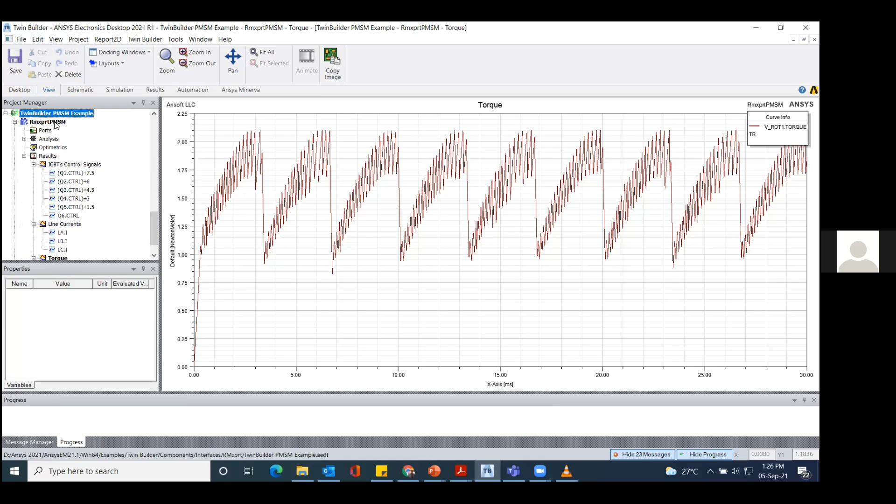Here we are using hysteresis band control. You can also use different techniques for controlling your PMSM, BLDC, induction motor, and switched reluctance motor. But for this example, I have used PMSM, and the next step is to go for the EV application part, the complete EV.

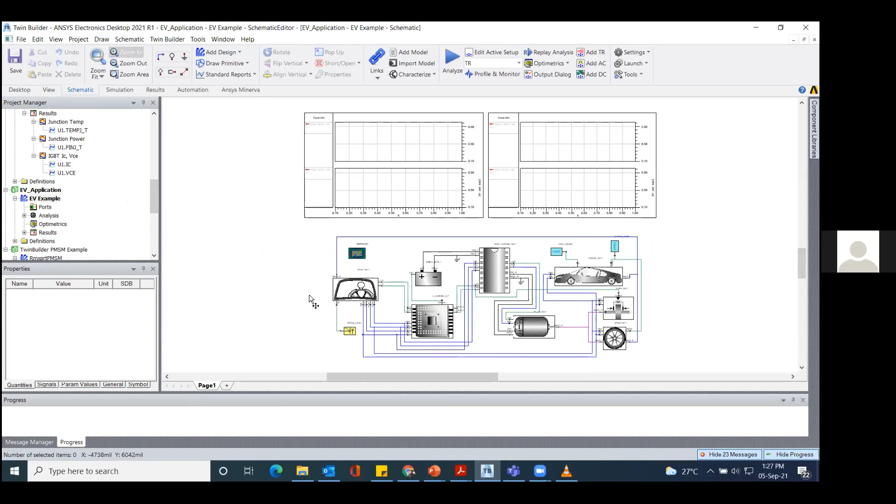So now in the EV we have a driver, and we have a driver, and your battery is being controlled, so for that we are using a battery controller. BMS is also there, and there will be a motor controller for motor controlling, which we have connected with the motor.

That motor will give information like the length of the tire, so we are feeding all the information in there, and then we will simulate it. That is the driver, and it will basically determine when we have to accelerate and when we have to decelerate.

So before going to the complete EV simulation, or the complete EV process, I would like to add something here and show you the result. Before going to that result, there is the driving cycle involved in that.

A driving cycle is also involved somewhere, like the Indian driving cycle or the USA driving cycle. So for checking your ICV, your whole motor, or your whole electric vehicle, we basically use a parameter called driving cycle, and that parameter driving cycle will be given here also.

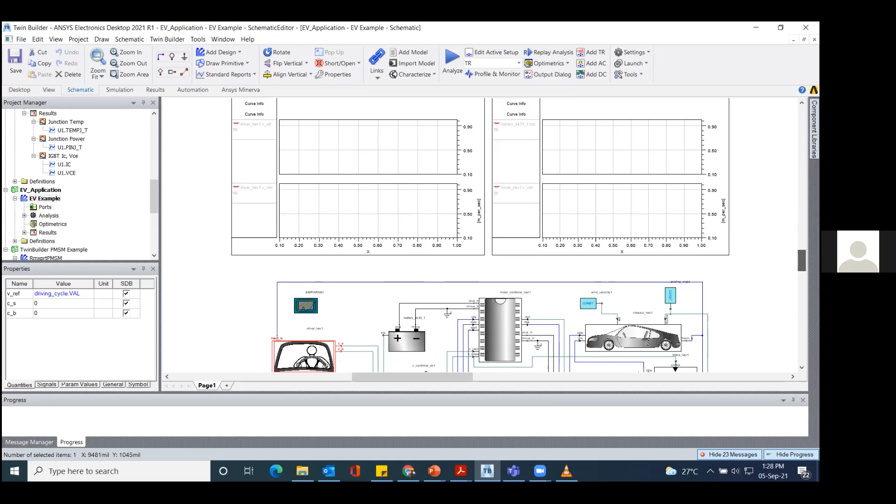So we will put in the driving cycle, and after putting in the driving cycle, we have to create a controller. So I am using a PI controller here to control and track that driving cycle, and we will also check the battery state.

So if the whole simulation runs, you will also come to know about that driving cycle, and that particular driving cycle basically gives you information in meters per second for a particular time. That will be provided by your driving cycle.

So that will basically give you information, and from there you will come to know what tracking I'm using, and what type of controlling we are using to track the model, and whether that will be working fine or not. So you will also come to know that, and you will also think about it.

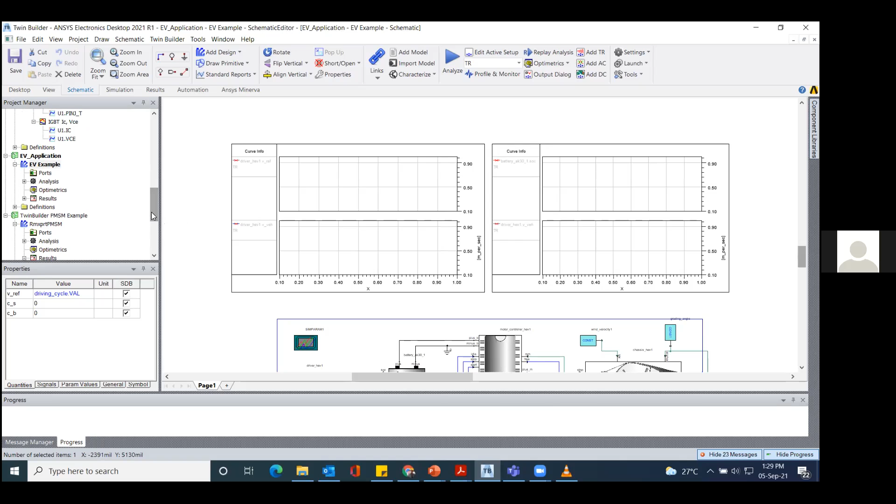So one more time I will explain the whole process. First, DC supply is there. Right now we are not using a charging point, and we are basically thinking that our battery is charged up to 70% or some range, and that will be fed to the motor controller. That motor controller also contains an inverter part inbuilt in it, and that inverter will feed our PMSM motor, our DC here.

And then we just have to check the DC. Right now we are using only a DC machine, so the machine is there. And a brake system is also there for the controlling. And one more thing I would like to add: if you are going uphill and your whole system does not contain a regenerative braking part, this means when you are coming down, you are wasting all the energy which is lost in coming up.

If your regeneration is 50%, then if X amount of energy is used by a vehicle for climbing up, up to 50% will be regained. If your regenerative braking efficiency is 50%, you will also charge your battery by using that regenerative part. So for an electric vehicle it is necessary to have a regenerative part, but for simplicity I have not used it here. But that is the main beauty of the electric vehicle, so you just have to use regenerative braking.

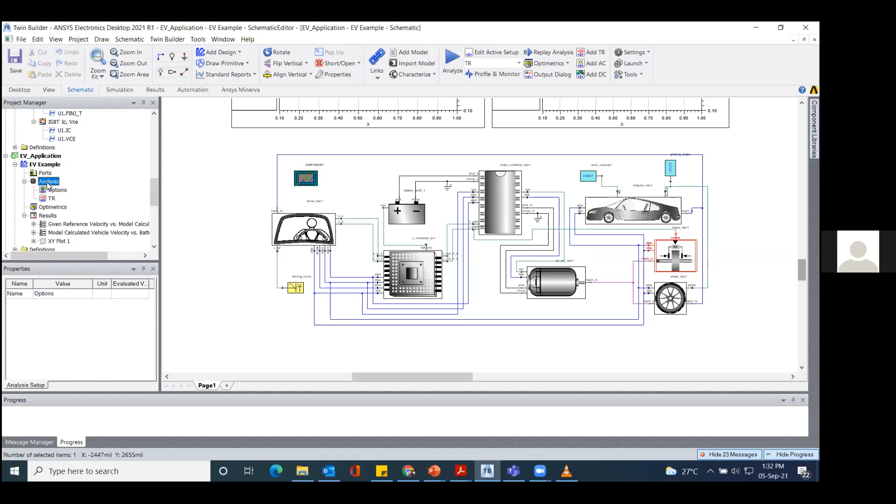But the drive cycle which we are using here is not considering the slope. We are only using a flat road, and we are running our model. So for that, I will analyze the whole system, and then we will check what result we are getting. Now we have analyzed it, and now we will check whether we are able to track it correctly or not.

This is the given reference velocity versus model calculated vehicle velocity. We have this driving cycle which we are using. This is basically a US driving cycle, in meters per second. We are using that driving cycle, and we are tracking it. I am using a PI controller here, so we can check that it is able to easily track it.

But at some points it is not able to track it. Like at this point it should reach 0, but it is not reaching the value of 0. So we have scope for improvement in the tracking part. Somewhere it is not able to track the lower points and the upper points. So we have to create a controller that will effectively control it in that range.

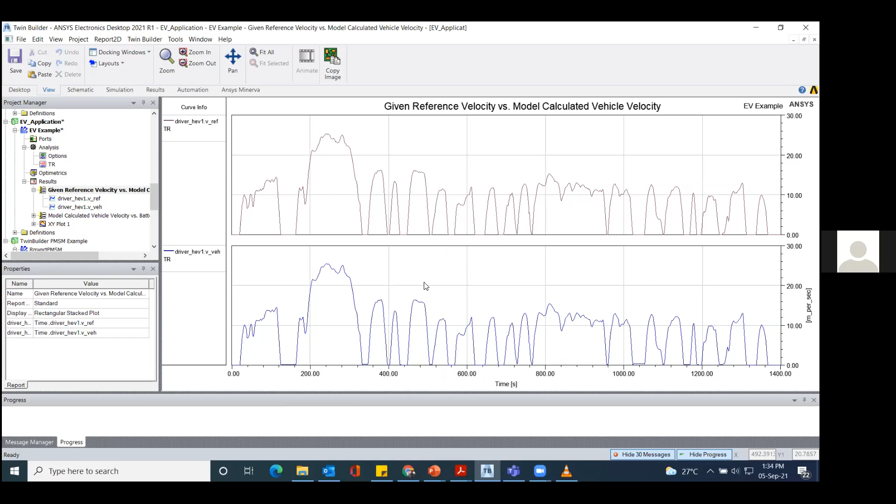And these are the iterations we are basically using. So go to that EV part. Okay. So what was the scope you can see here from the research point of view? You can go for regenerative braking. You can also improve the switching losses by using power electronics devices. You can create perfect tracking devices, so that will track the speed.

You can also go for sensorless driving for the BLDC and PMSM machines. So the sensorless technique is also important when we are going for the designing part. Like if your sensor is not working fine, like if you have a BLDC motor and you have three sensors, H1, H2, H3, and that sensor fails, so that will also be a very important point of consideration.

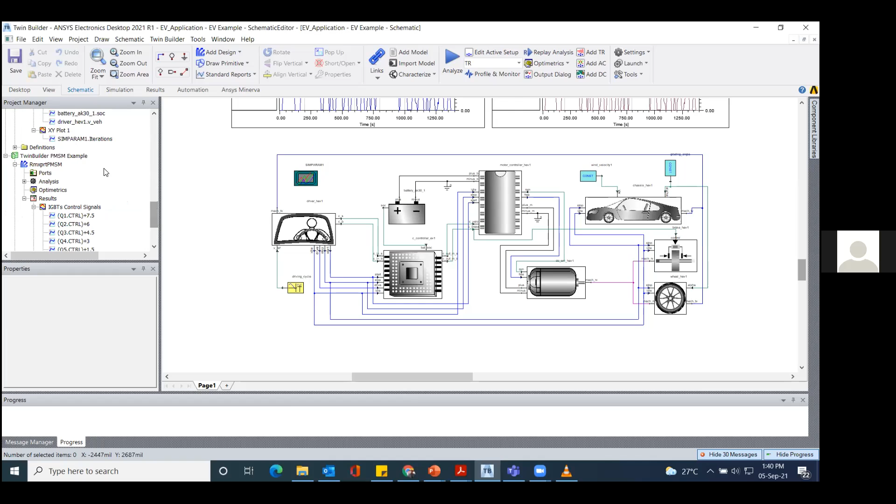Okay. And then we can integrate both the Twin Builder and the Fluent? In Twin Builder, like I have already shown you, I have designed a motor. And likewise, you can design the whole system and then just put it here. Like that motor part is designed in different software, and from there we have used this. So you can also import it and integrate it for co-simulation.

Okay. Another question I have is about the lines which are connecting these particular IGBTs, motors, and the batteries of this model. A similar kind of thing I have also seen in MATLAB Simulink. Yes, sir. But in MATLAB we cannot do the 3D analysis; there we have only a single line diagram. Yes, right. So here these lines signify the electrical signal. Yes, sir. Right? Okay.

And one more question, can we do a multi-physics simulation, like part of that you have already explained? Yes, sir, I already explained. We are doing basically multi-physics here, because without doing the multi-physics, we cannot go for designing of an EV system. So here, let's say we want to simulate road data also, other than drive data, then some drag coefficient, or some jerk in the powertrain. We have to feed such information like rolling resistance, because the road is not always flat. Right, we just have to put that data also.